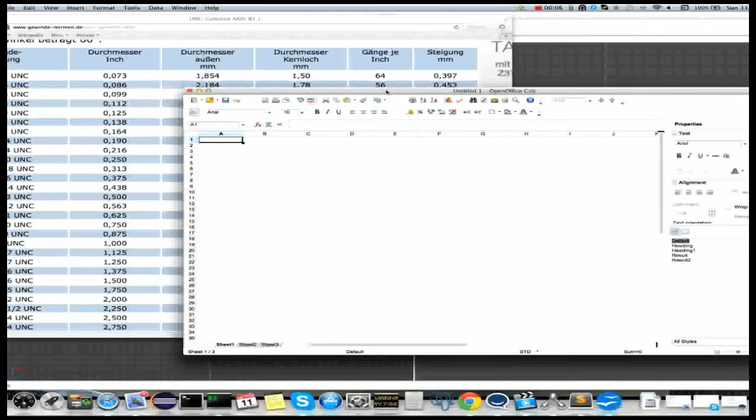I look up the standard of the screw, which is 1/4 inch with 20 advances per inch. In millimeters, this is 6.35 outer diameter and 5.11 inner diameter.

Since we cannot use the exact values, we have to add a little bit to make the screw actually work. I add 0.65 millimeters, so the total diameters become 7 and 5.76. I divide that by 2 to get a radius instead of a diameter. The same goes for the advance, and finally we have our values for the 3D modeling.

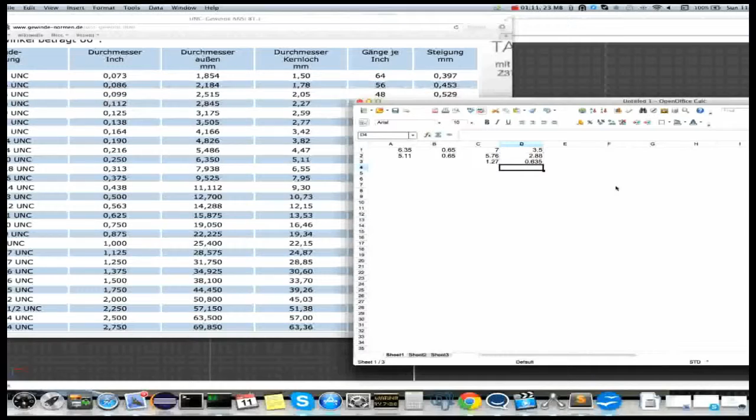I use AC3D, my preferred 3D modeling program. We'll fire that up now. Well, actually it's already fired up. Come on, click... yeah, here we are.

I use these values to create a triangle, adjusting the coordinates manually via an input you can't see, unfortunately. Then I revolve that triangle 5 times around the y-axis, and here we have our screw.

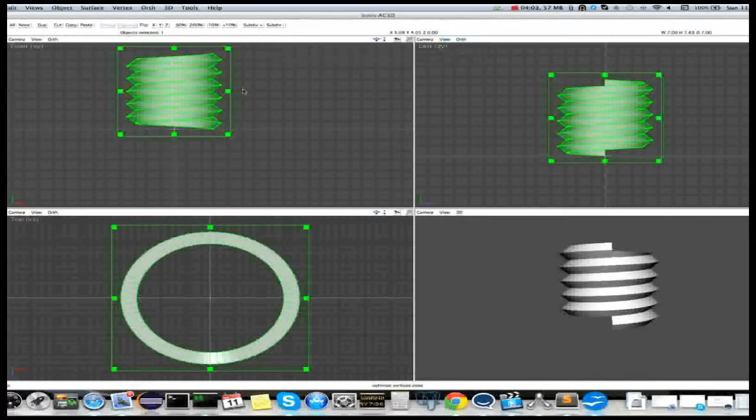Of course, now there are a lot of leaky surfaces, meaning surfaces which aren't connected. So I select all the vertices and snap them together by distance, then simplify the object. As you can see, only the top and bottom are still open surfaces.

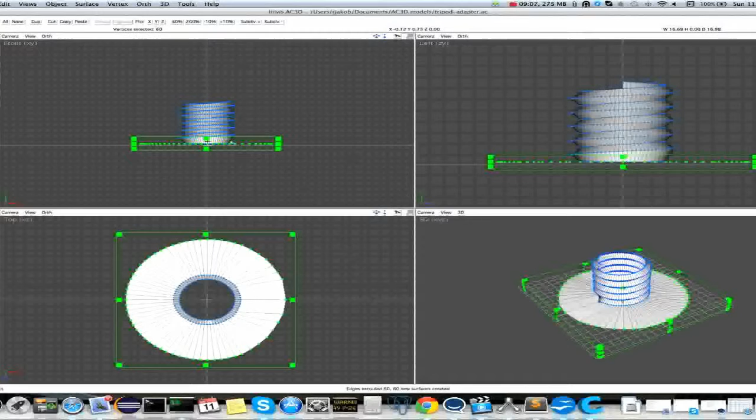Now I select all the lower vertices near the bottom, pull them down into a plane, and extrude the edges. As you can see, it's not perfectly centered, so I correct that a little. Then I extrude the edges again to form the outer hull of the nut.

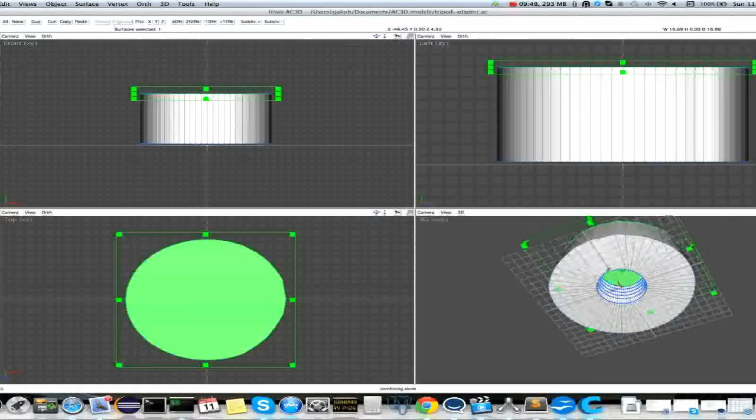I pull them up so that this inner construction is covered, and make the top thick enough to have a bit of stability. And here we have, yeah, kind of a nut.

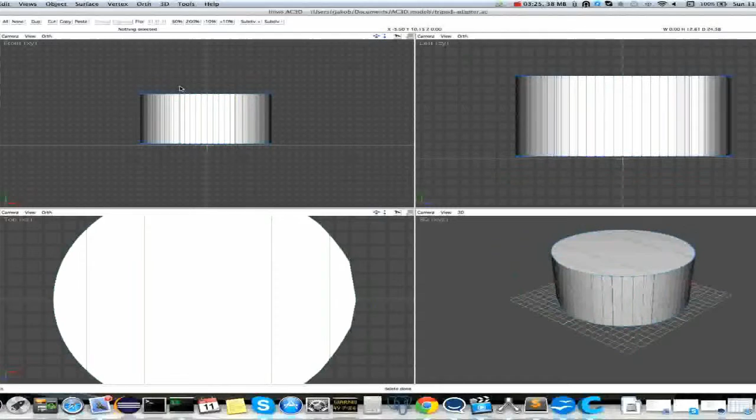The top surface will be combined so that we have only one surface instead of a lot of triangles. That makes the job easier afterwards.

Now that we have this top surface, I'm going to use the knife function, which is really nice. With knife you can slice an object into separate objects, or just slice the surfaces of an object. I'll use the latter multiple times.

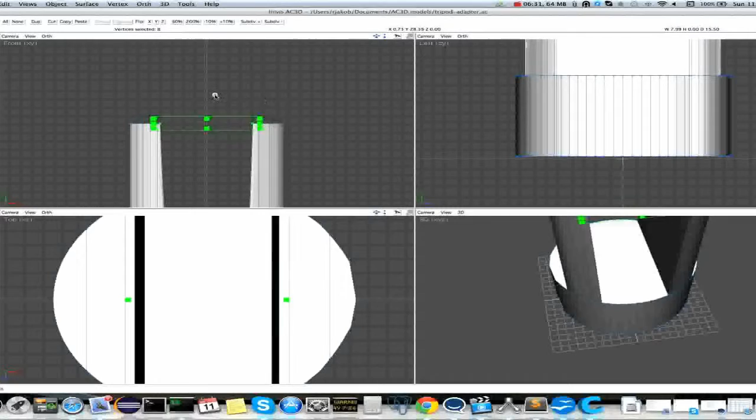So I get more than one surface from the top, cut so that I have some surfaces which I can extrude to the top, which will form the handle for the phone.

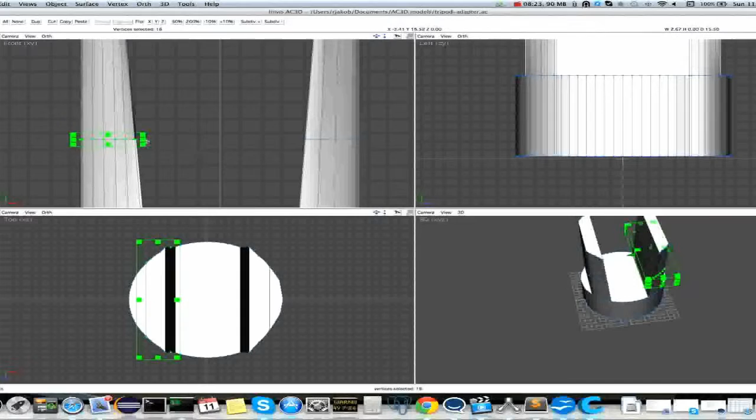I'll do that a bit quicker since I had to measure the distance from time to time. Finally we have 2 surfaces which I can pull up, extruding them.

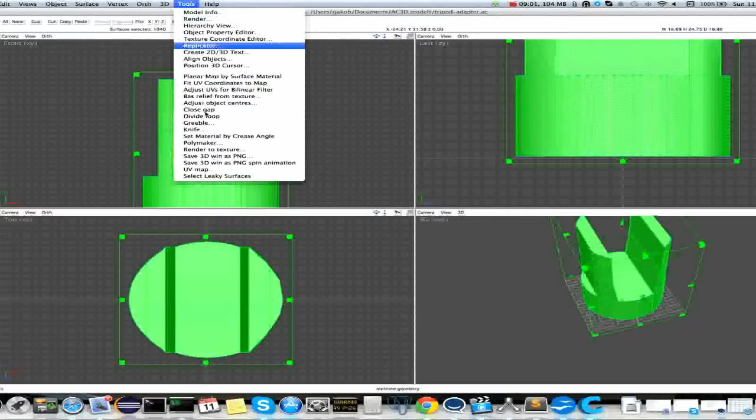My phone isn't perfectly flat - it's thinner at the edges and bulges in the middle, so I try to adapt for that, with some measuring of how far the vertices are apart. The distance is shown in the upper right corner in AC3D.

Push them in, push them out a little bit, make things a bit thicker, a bit thinner, and so on until I'm satisfied.

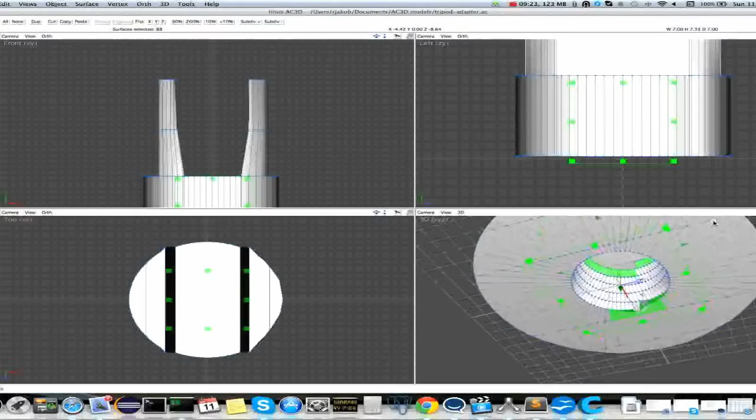Of course, I also made sure the height is enough to hold my phone, and that the distance at the very top matches the thickness of my phone. Yeah, at that point.

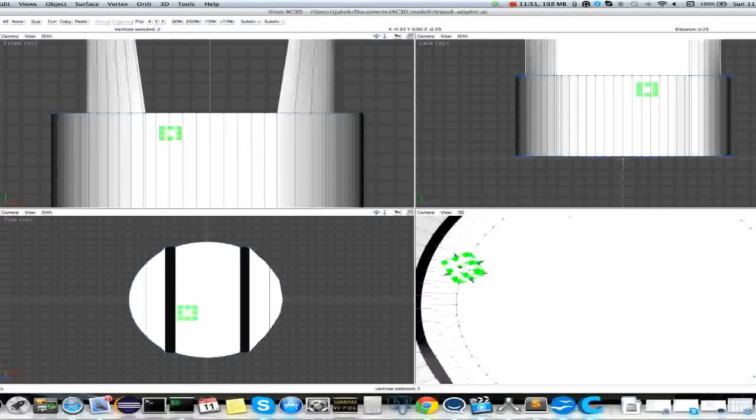Finally, I use the knife function again to add a little bulge inwards. So again, some vertex pushing. Yeah, that should roughly do it.

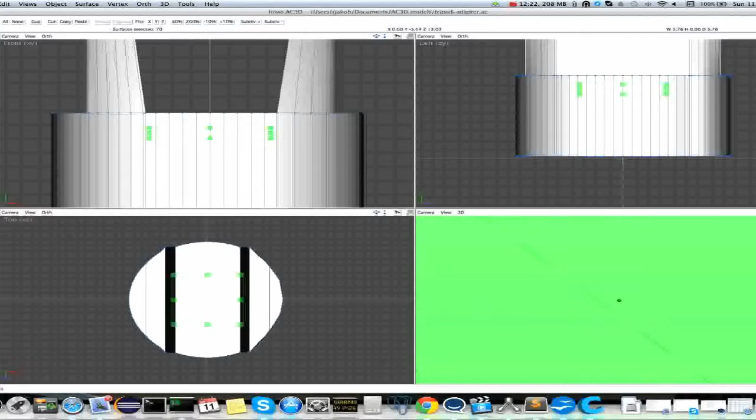And it looks nice - that should be good enough to hold the phone. It doesn't have to be exact to a tenth of a millimeter, since it should have some play anyway. Yeah, and that's a clamp.

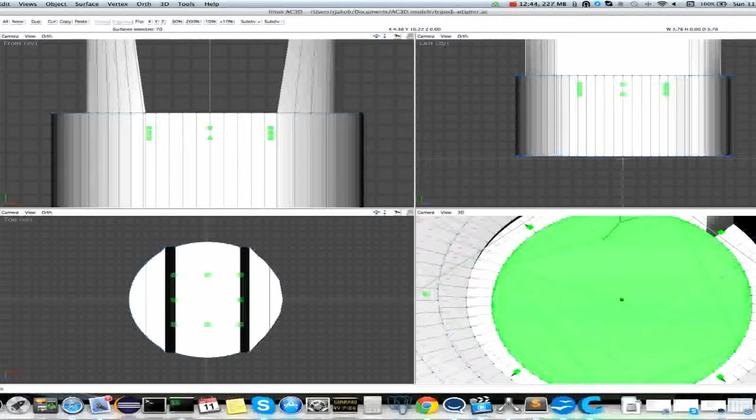What I should always do with 3D modeling for a 3D printer is check for leaky surfaces. The surfaces have to be closed, because otherwise the 3D printer will have trouble creating a real 3D object. It can't be open at any point.

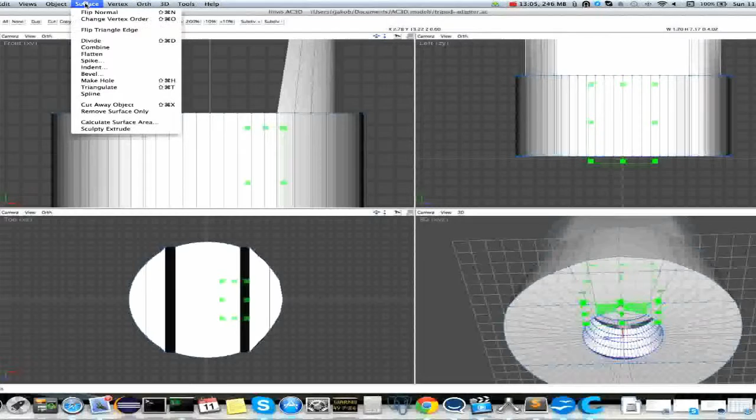And as you can see here, I forgot one thing - the top of the thread. So let's close that again.

So what I do is zoom in, select some surfaces, then do a loop select, and create a surface out of these vertices.

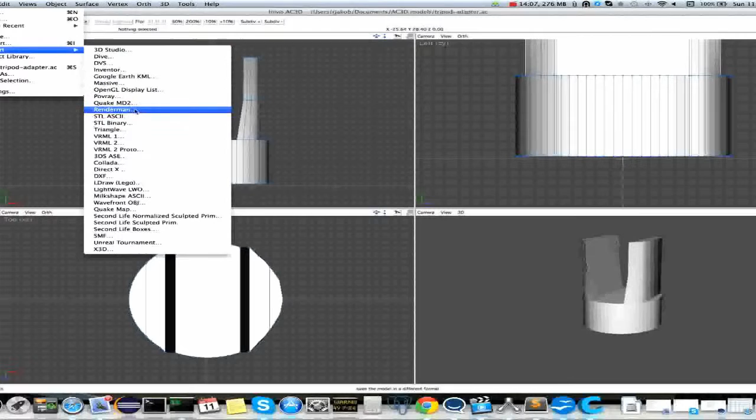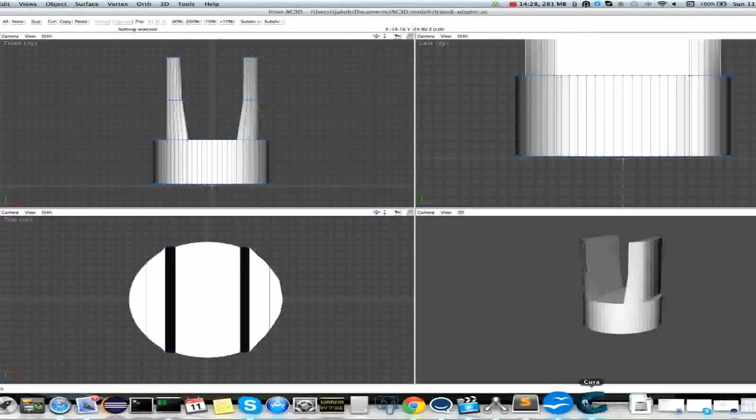The next important thing is that the normals are pointing outwards for each surface. That's also quite important for 3D modeling in general, and especially for a 3D printer, so that the slicer we'll use in a minute knows what is outside and what is inside.

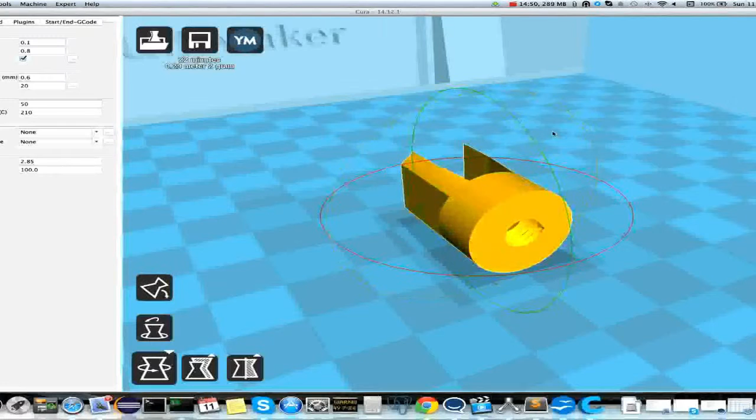AC3D shows the normals with a very thin pink line, which may or may not be visible in this video. I think it's hard to see, but if you want to try AC3D, you'll see yourself.

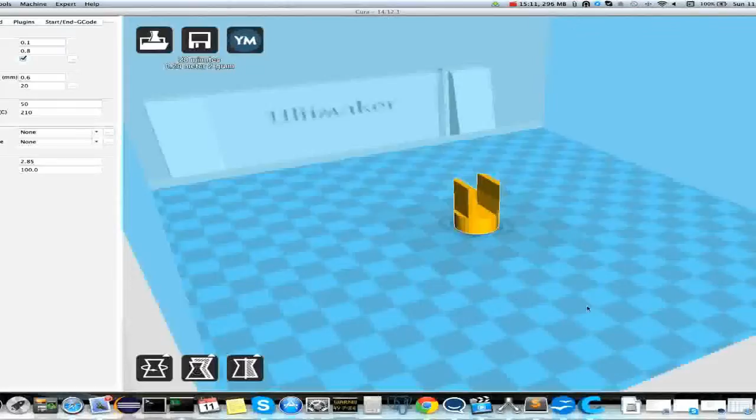So now that all the surfaces are closed, except some very minor ones at the very bottom of the thread, which I don't really care about now, we have our final model.

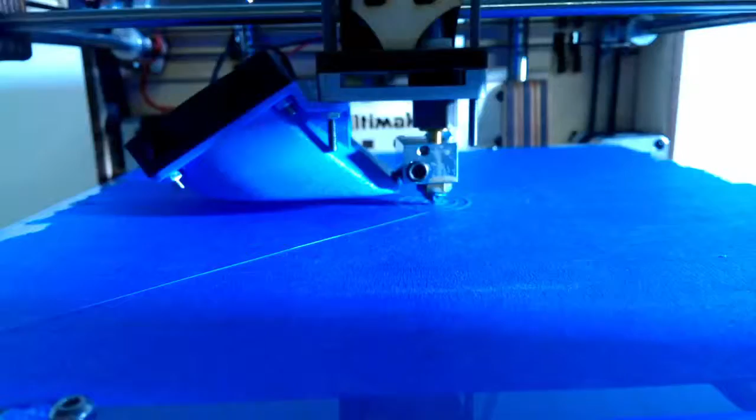I tried to close this by making a triangle and simplifying the object again, snapping the vertices together and so on, but I figured it's good enough for printing.

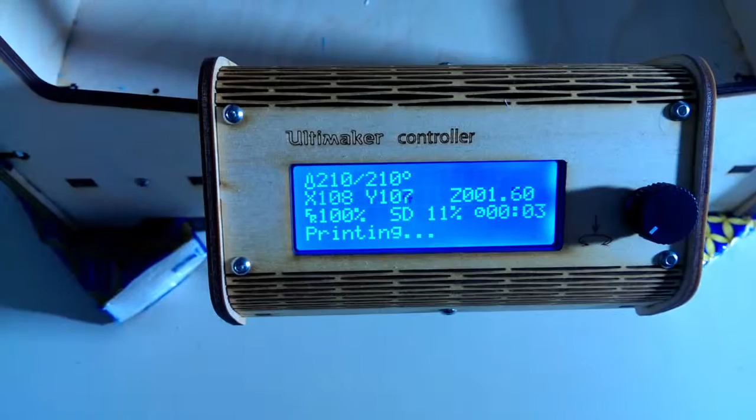So we can export that, and I use the STL-ASCII format, which is one of the input formats that Cura can work with.

Cura is the slicer that will produce the layers that the 3D printer will use to extrude the filament onto the printing plate. So I import that file.

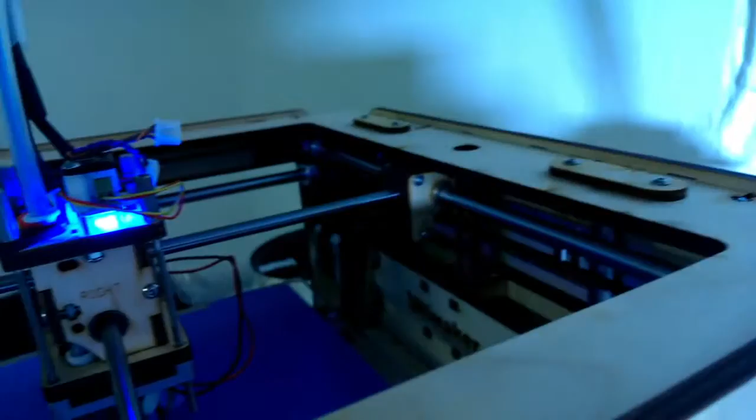And we should then immediately see how this object will look. By the way, it closes some surfaces as well, so it will correct the minor imperfections I left.

It will take 28 minutes and use about 2 grams of filament. These are the dimensions of the object.

And I will print at 0.1 millimeter layer height with 50 millimeters per second and at 210 degrees.

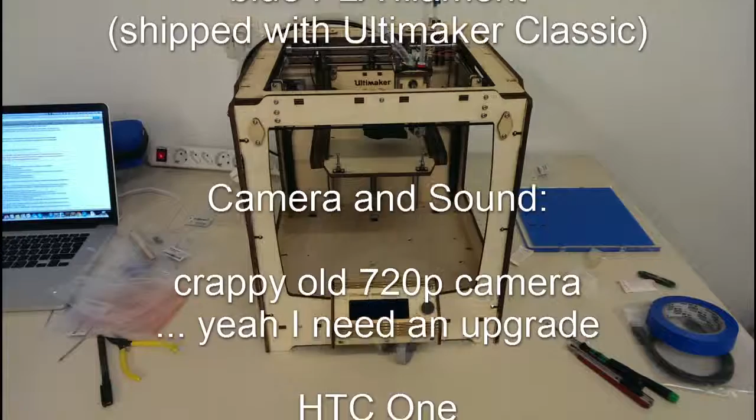Now this is coming directly from the 3D printer, and let's see if it fits. Yeah, it fits, and it can hold my smartphone.